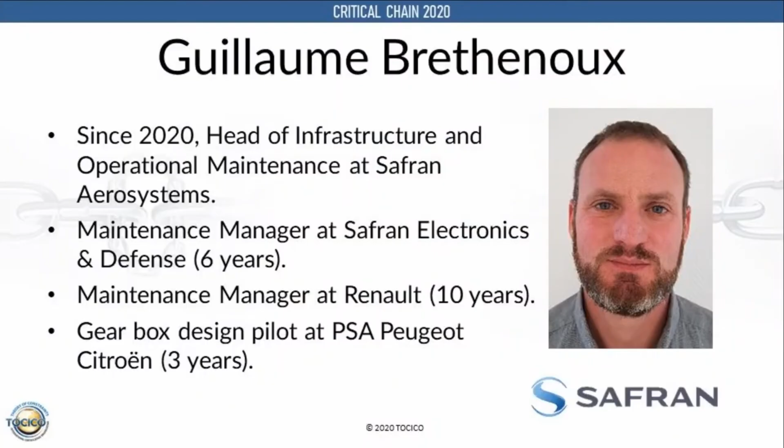The project that I will present you takes place in the factory of Mantes-la-Ville, so for Safran Electronics and Defense. This plant produces mostly flight control systems for both civil helicopters and planes. You can see around on the slide a few examples of our products, like throttle controls, like backup power supplies, like trim actuators, etc.

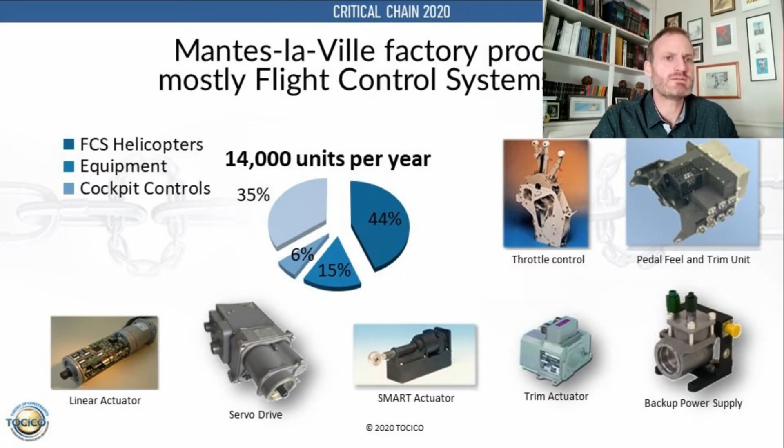The plant of Mantes-la-Ville is a production site. We do the machining and assembly of our products, and we do the machining of the most complex mechanical components. Our machining shop floor comprises around 70 different machines with different production processes, like turning centers, milling centers, electro-erosion, grinding,

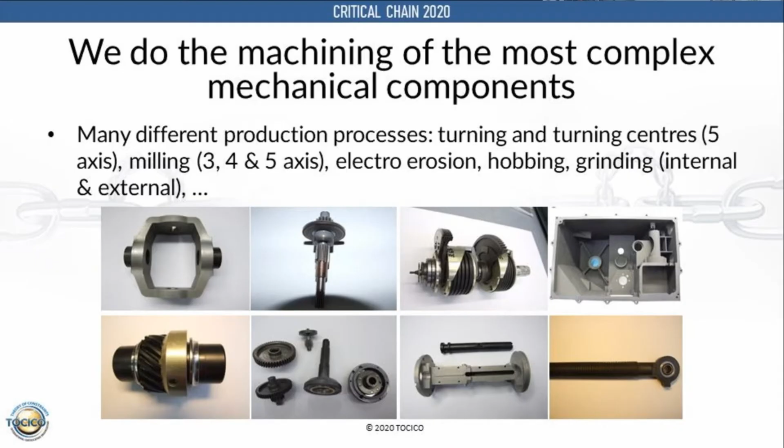and so on. So the project, just before we begin, let me say the plant reorganization layout project that I will present you today was just a part of a bigger TOC project launched in Mantes-la-Ville. The goal was to allow our plant to increase its on-time delivery and productivity.

The target of this layout was to help to reduce lead times, to simplify the flow of parts, to increase throughput, to improve productivity, to reduce variation, to improve work environment, and to enable the installation of new equipment.

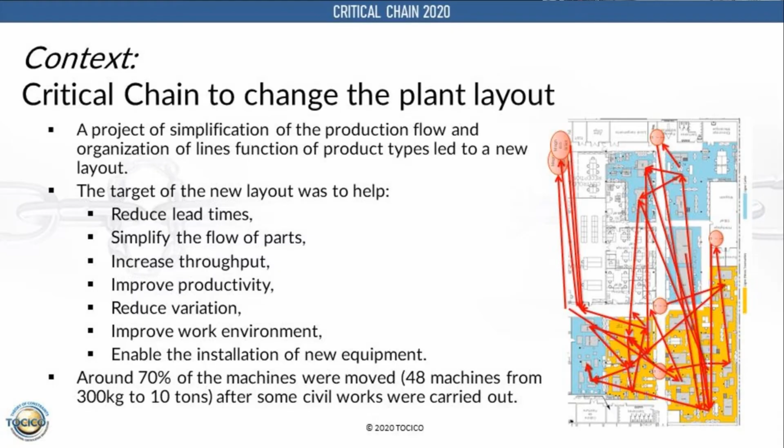When we first spoke about moving around 50 machines, my first estimated planning pointed out around 8 weeks of work. 8 weeks. So my first hypothesis was to take both months of summer 2016 to do it, so 2 months without production. The production director disagreed with this idea, so I built a second hypothesis, which was to divide the project in 2 parts, 1 month during winter 2015 and 1 month during summer 2016.

So for both hypotheses, the reaction was no way, no way. In order not to disturb production, he allowed me a slot of 2 weeks during Christmas holidays 2015 to perform this work. So only 2 weeks. I began with 8 weeks and I had to do it in 2 weeks. So to make things easier, during those 2 weeks were two 3-day weekends, including Christmas Day and New Year's Day. So nobody believed it was possible, me first, and everyone said impossible, it will never work.

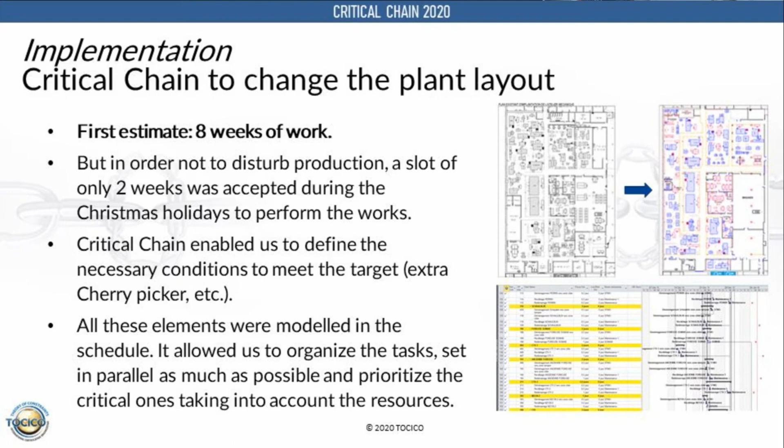It also helped us decide how many parallel teams we had to build. So we needed 4 teams: 1 team to unplug and plug machines, 1 team to move them, 1 team to make them ready to restart, and 1 team to move all the furniture around machines. So during 3 months, we made plans representing day-by-day movements of machines. So we have a simulation of all the movements of the machines on plans.

So if I had to sum up all these weeks of preparation, I could say that it really helped for one thing: it made the project possible. I began to believe that it was possible, and then to convince everyone taking part in the project that it would work. So after hours of preparation, dozens of plans, liters of coffee, many white nights, we started the project.

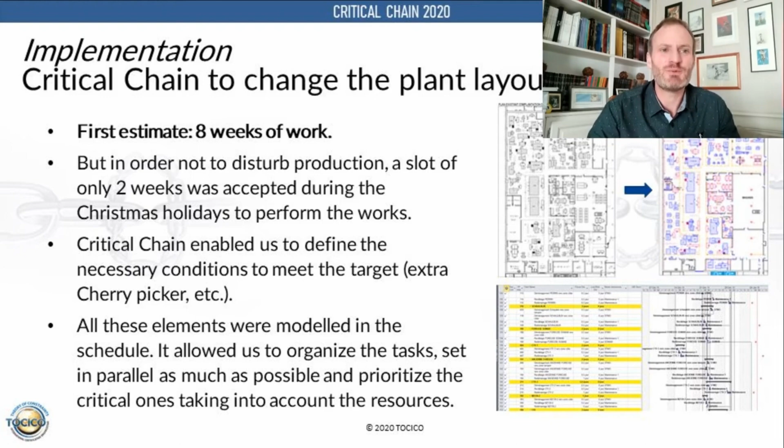Probably one of the first keys to the success was the involvement of the whole team, from the preparation to the restart of the machines. We included everyone from operators to team leaders, from maintenance technicians to machine suppliers. During the two weeks of the project, we really insisted that the operators working on the machines we moved were here in order to participate and organize all their work environment.

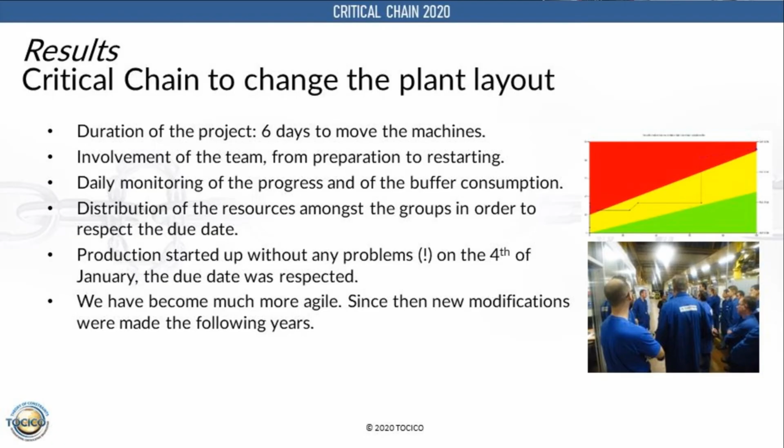So during these 2 weeks, we did daily monitoring of the progress and buffer consumption. You can see our fever chart on the right side of the slide. Each morning, I managed a short meeting where everyone was present. I reminded everyone which machines were moving from which place to which other place, where each team had to work, and in which team each person had to be. So the goal was to focus everyone on his task without question.

As you can see on the fever chart, it wasn't won in advance. Just an example: at the end of the first day, we were already late. The buffer consumption was already high. Why? We didn't anticipate one little thing. The team that moved the machines, a really competent supplier, had to have lunch outside of the plant, but we were in Christmas week, so no restaurant was open. So they took 3 hours to have lunch instead of 1 single hour. So we lost a lot of time that day.

So as you can see on the fever chart, things went better the following days. Everything worked as we imagined during the preparation. I can even say that everyone's confidence grew each day, as they could see that it all worked as planned. We managed to restart machines on the planned day.

On this day, people who didn't participate in the adventure found the plant completely reorganized. They left their machines working in one place and found them in another place, cleaned, working, with all their furniture and workplace organized. So it helped to create a new dynamic, to improve the flow, and we then made new modifications in 2016 and 2017.

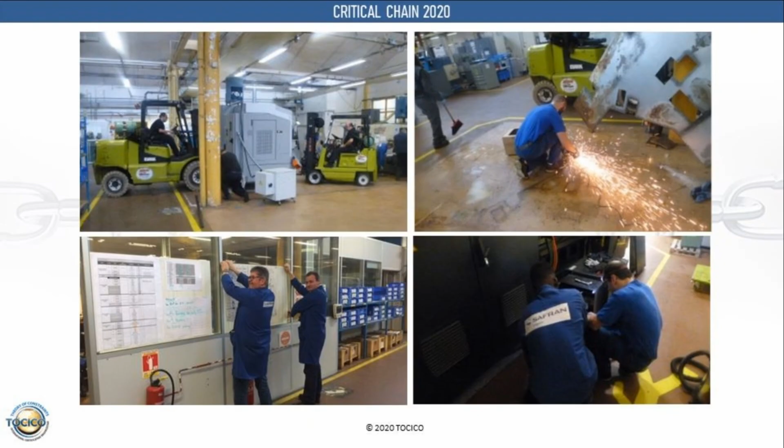In conclusion, I can say that this project was probably the best professional experience I had in 20 years. It showed me that with the good tools, such as Critical Chain, and with an open-minded team, really everything is possible. I really hope to have a new experience like that, maybe for a bigger project. But the ingredients will be the same: preparation, motivated team, and Critical Chain.